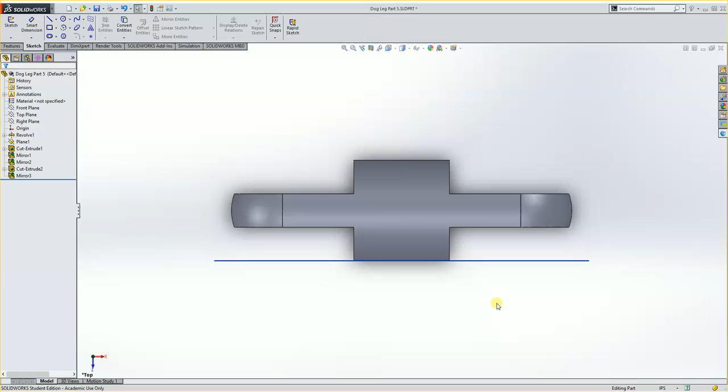Otherwise you can just saw cut a bunch of parts 1.375 long and that will be sufficient for what we're doing. On this part I need to make a couple things. One is that if I look at this from my front plane here, you'll see that this is rounded off, and that's not really necessary. If I were to do that, I would have to turn this end on the lathe, and I don't want to have to do any extra steps that I don't need. So what we're going to do is just kind of do that with a straight cutter on the mill.

So I'm going to need some geometry for doing that. And the other thing is I want to make some stock for this to simulate against. Again, not required, but it makes it a lot easier to see what we're doing. So what I'm going to do is start out by making my stock.

So I'm going to go over here to my configuration manager, and you'll see I just have a default. I'm going to click on dogleg part 5, and then right click and say add configuration. And in here I'm going to call it stock, and hit OK.

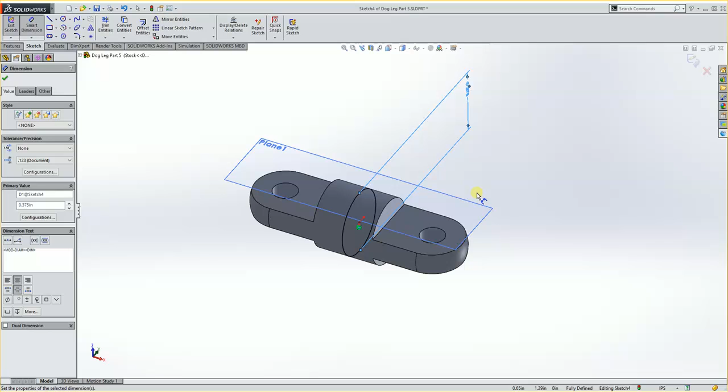Now if I go back over to my feature manager tree and look at my right plane, you'll see that that is a cross section of this part. So I want to draw a circle on that. I'm going to tell it to sketch a circle. If I go to my origin here, I'll draw a circle out. Again, it doesn't matter how big. And then I'll smart dimension this circle to be 0.375. That gives me everything I need for this next portion.

I'll tell it to do a feature of an extruded boss base, and I want it to not be blind. I want it to go both directions. So I'm going to tell this to be a mid-plane, and then my length here I'm going to type in 1.375, and that will give me what my stock will look like. And I'll hit OK.

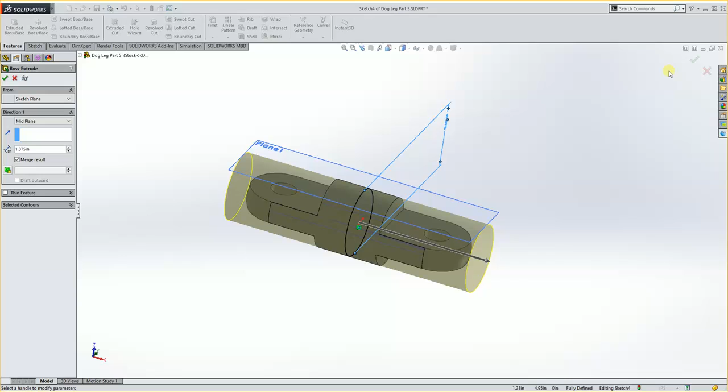So now we have a configuration of our stock. I'm going to go back to my configuration manager and double click default again so I actually have my part. Now the next thing we're going to do is create some sketches that we'll utilize for side cutting this.

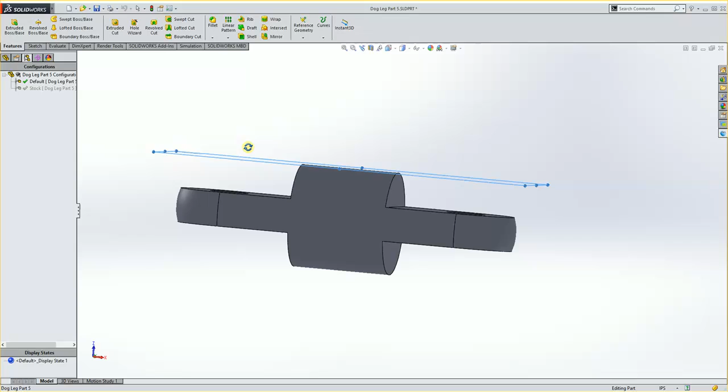So I'm going to go in here to my plane number 1. And actually I could choose this plane. I might make it a little bit easier. So I'll choose that plane there. Oh, we'll just use plane 1.

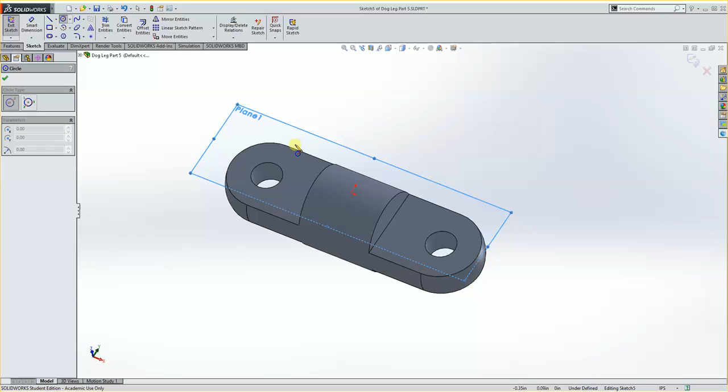So under plane 1, I'm going to tell it to sketch, and I want to make a circle. So I'll tell it circle, and I want to make it at the center of this and bring it out. So I might need to hover over the edge of this circle here and then go to the center of it - see this little black dot that appears - and click. I'm going to drag that out, and I'm going to make another one on the other side. So I hover over that, click on the center, and drag it out. I need to smart dimension both of those to be 0.375.

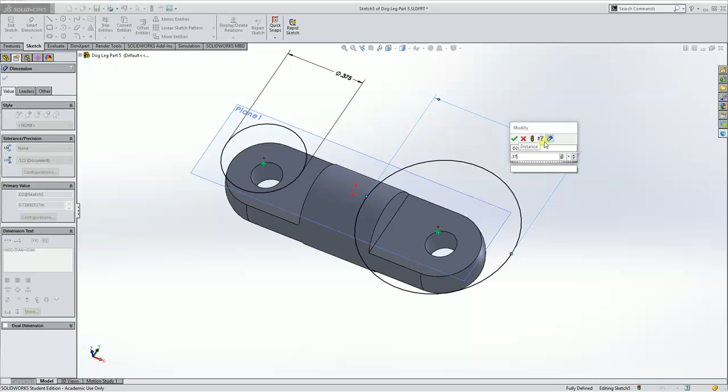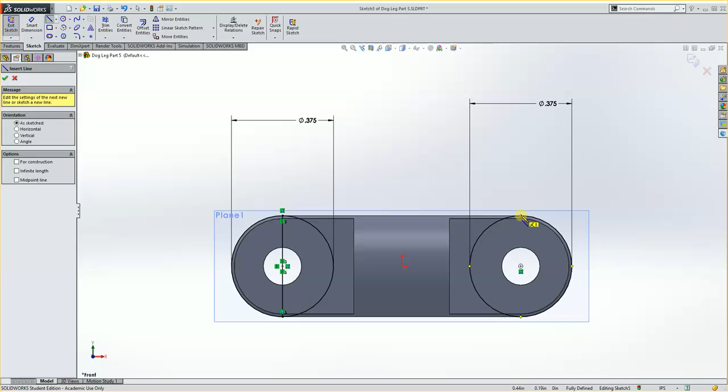Alright, so I have two circles there. I want to divide them in half and then trim them off. So I'm going to look at this from this plane - it looks like it's the front plane. Or I could Normal To. And I'm going to create a line from the quadrant here to the quadrant there. And then create another line from the quadrant here to here. And I'll hit escape. Now you'll see I have these two circles that are divided through the center.

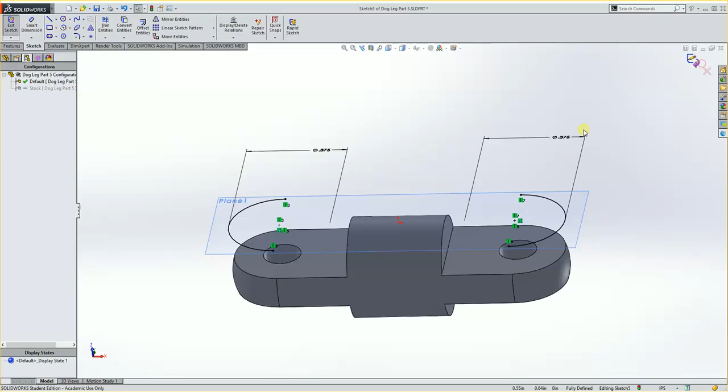Then I need to go to trim entities, trim to closest, and I can choose to delete the inner portions of the circle and then also the line that I just created, and this will give me a half circle on each end. And I will confirm that. Now I have the sketch that I need for actually machining. So now we're prepared to go in and do the machining of this part.